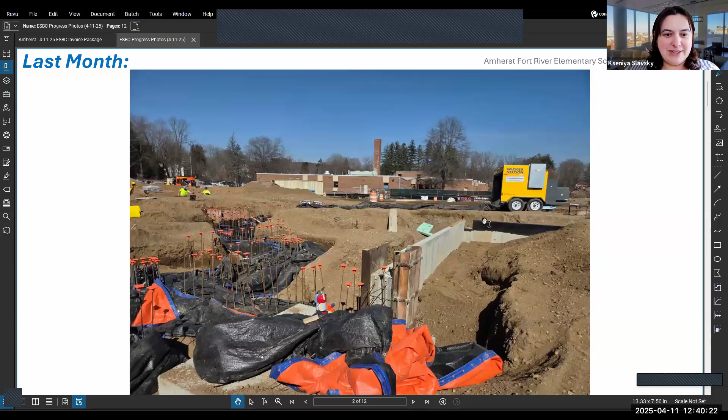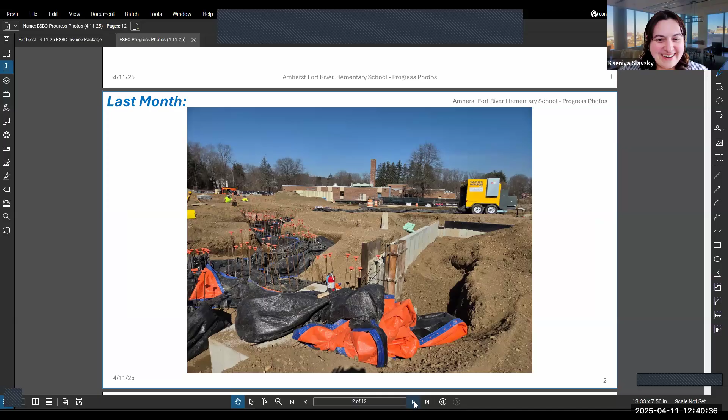Connor, thank you for pulling that up. We do see gray blocks over the screen where people's faces are, I assume, on your screen—I don't know why Zoom does that. That's looking better. Connor, go ahead and flip through the pictures slowly and we'll show everybody where we are. The first picture is a reminder of what we showed you last time, which we thought was very exciting, but some of you thought was less so. I don't know why.

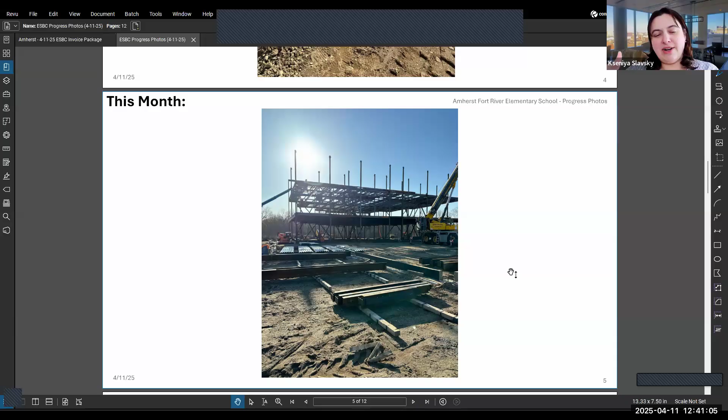We're not too offended. Continuing on, this is another view of that same exciting status we had last month. Now for comparison, you see something coming up in the background? Let's move forward—there we go. That's our building starting to get built. We have had steel deliveries coming throughout the weeks. They've had to take a few days off, especially Saturdays, because of the rain, but for the most part they've been able to be very productive and efficient, working with the weather and around it to keep the progress moving.

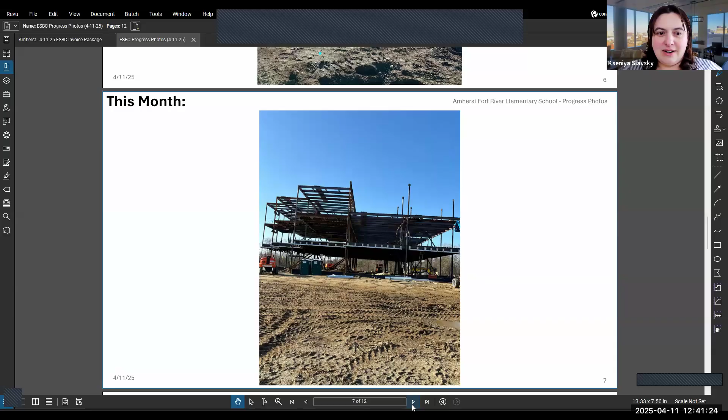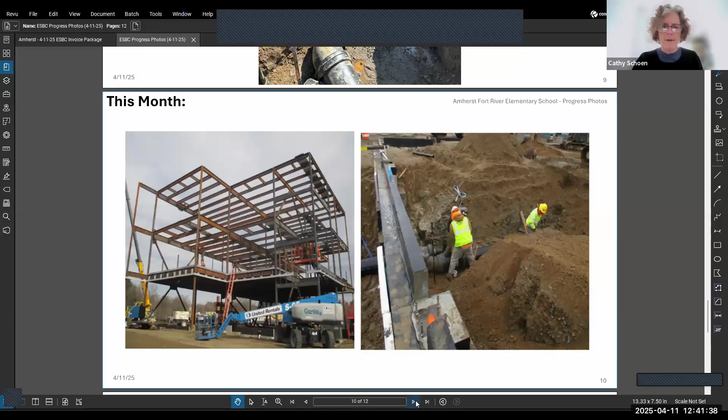Does anyone have any questions as we move along for these? There's not been any delay with our steel—we managed to get it in without the customs issues that were possible last week. So far, so good.

Other things going on site and preparing to go forward soon: the geothermal well grid has been laid out, and the permits associated with that installation have been submitted—everything appears on track. We are expecting that installation to start midway through May. There are plans to get that done as efficiently as possible, possibly with as many as 4 rigs going at the same time, if it proves to be efficient.

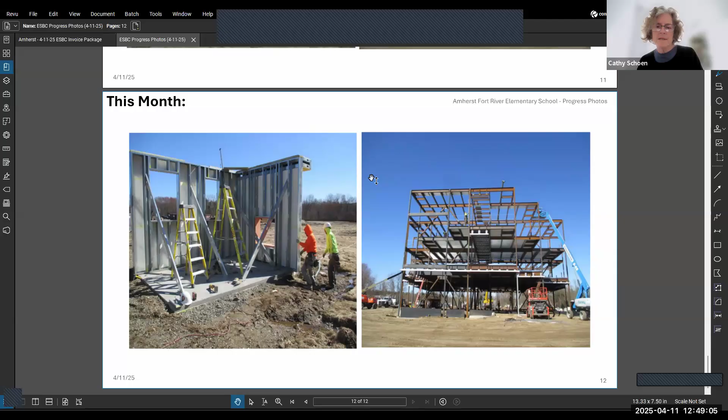So I'm seeing no other questions. That's great to know, Kseniya. Now at the council meeting, not the one next week, but the week after, I'll be able to report on some of this. And knowing that Sam is putting out postings, we'll be able to refer to that. That's terrific. Thank you. And Connor, you can go ahead and take down the slides.

So the next agenda item, Bob Parent, this is for you - just a brief update on wherever we are on the playground.

Certainly, sir, thank you. For those that may not recall, the playground surfacing, the Corkeen material that the town has agreed to install on the playground, the town has agreed to procure that separately outside of the construction contract that CTA is performing. So we're beginning that process, myself working with Simone.

As we began that process, at about the same time, we also became aware of some concerns regarding a Corkeen playground that was installed within the last year. The closest significant project that Corkeen has done, in Easton, Mass, at Richardson Olmsted School, has some concerns regarding the performance of that playground that was installed less than a year ago.

Margaret actually went down there a couple of weeks ago, took some photographs, and confirmed, in fact, that there are absolutely some performance problems. Since that time, I've reached out to the facility director at the school to try to better understand his perspective. He's new to the district, came on after the product was installed, but has very quickly come up to speed.